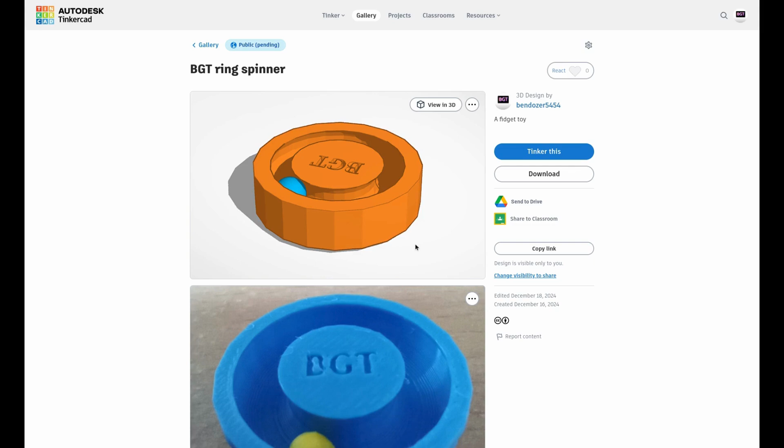After logging in, take the link given in the video's description or comments, copy it and paste it into a tab. You'll then be met with a screen. If the link is invalid after a while, you can search it up using BGT Ring Spinner.

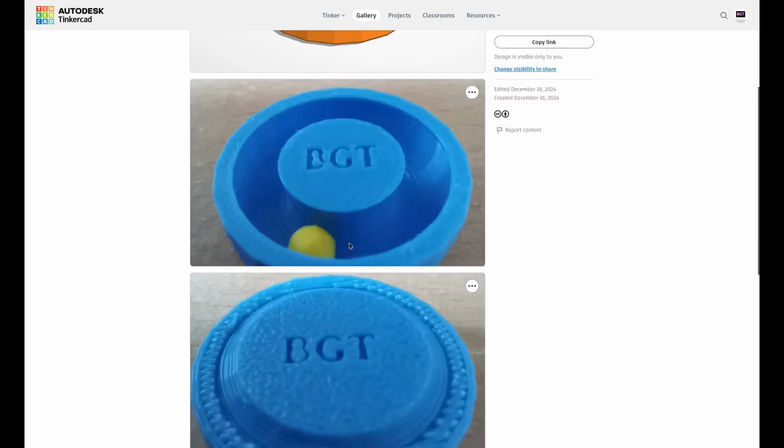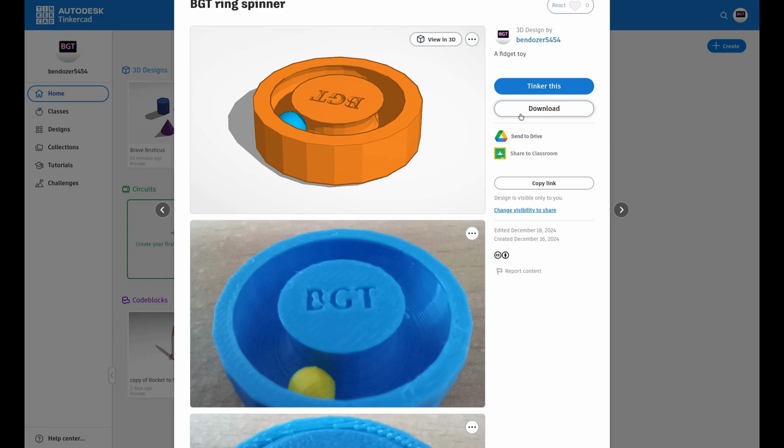You have two screens, either a touch screen or this screen. Either way, you'll have two buttons: Tinker this and Download. If you want a single color print, simply click Download and download either of these files. If that's not possible, use the file converter to convert the data to whatever slicer data you need.

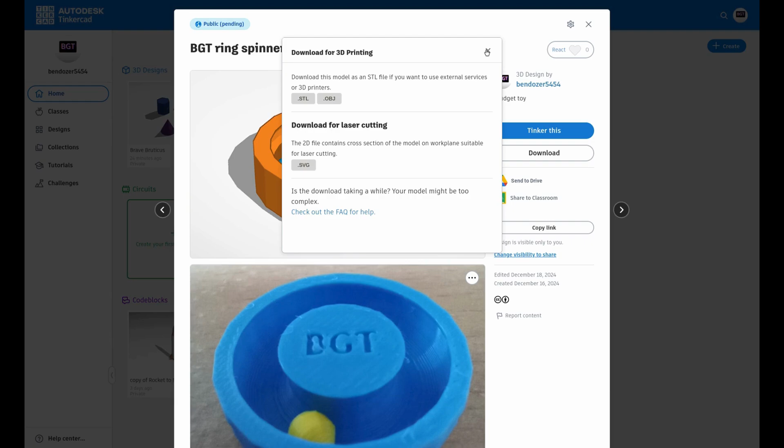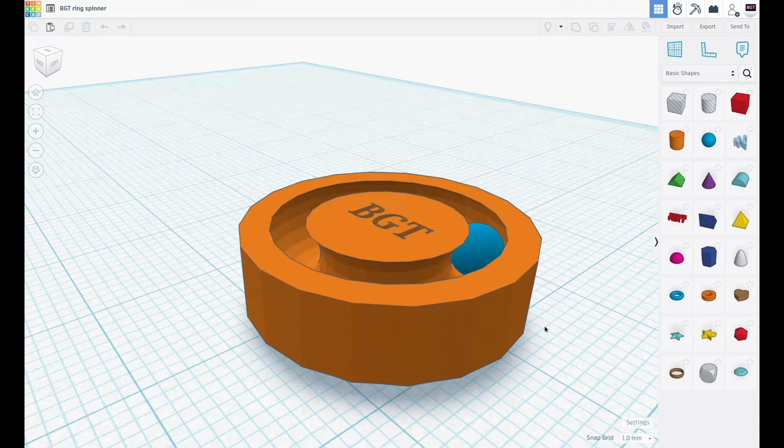If you want a multicolor print, click on Tinker this, because normally it will think it's one object. After clicking on Tinker this, you'll be met with a screen showing the product itself. Click on the base and export it using the 3D print file you need. Then export the other file, the ball. Identifying which file is which will be useful so you don't get confused about what you're downloading.

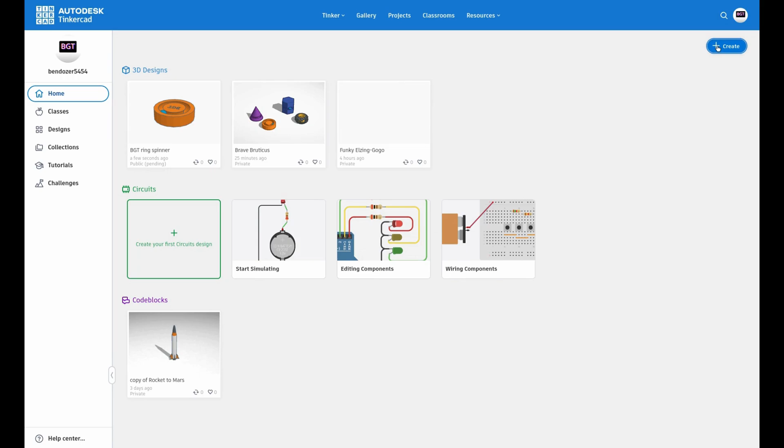The tutorial isn't over yet. Now I'm going to show you how you can make it yourself. First, create a new project, 3D design. You'll then be met with an empty canvas, or work plane.

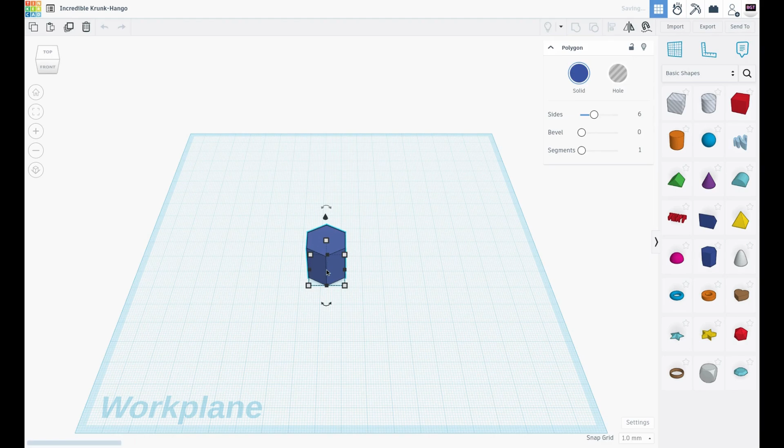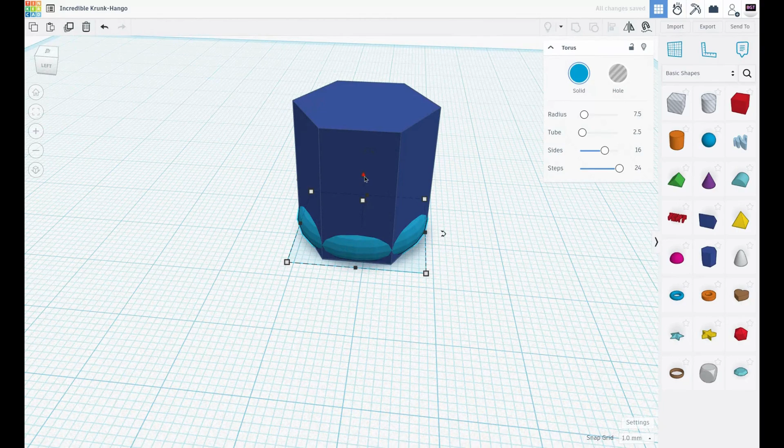Pick your favorite object. I'm going to pick the polygon, then pick the round ring. Size it to your liking using the squares given at each corner or side, then fit it further. Pick hole. The recommended steps and sides is always 24.

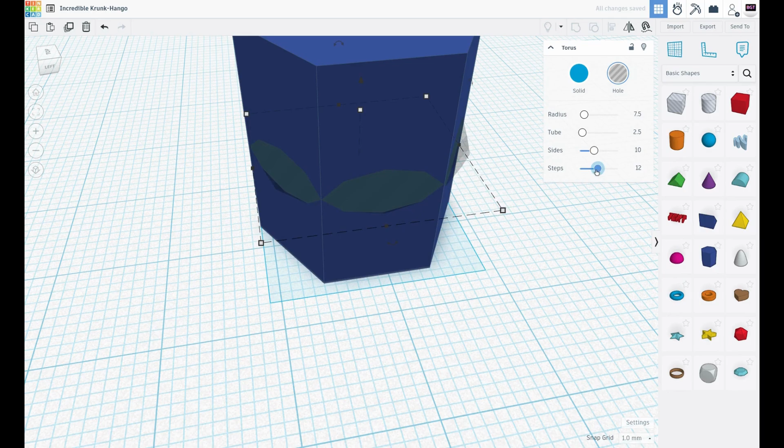If you're going for a low poly style, the recommended value is 10. I'm going to go with 24 for this tutorial. Radius and tube size can be modified for sizing it correctly. I'm going to modify it like this.

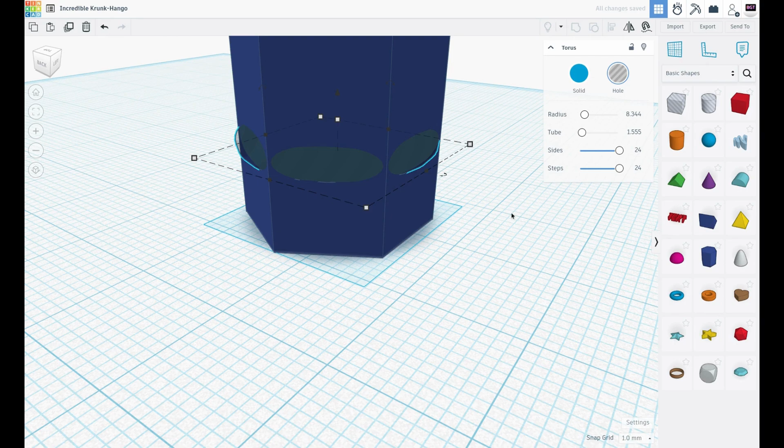Choose both objects and group them. You'll finally have a torus with a hole.

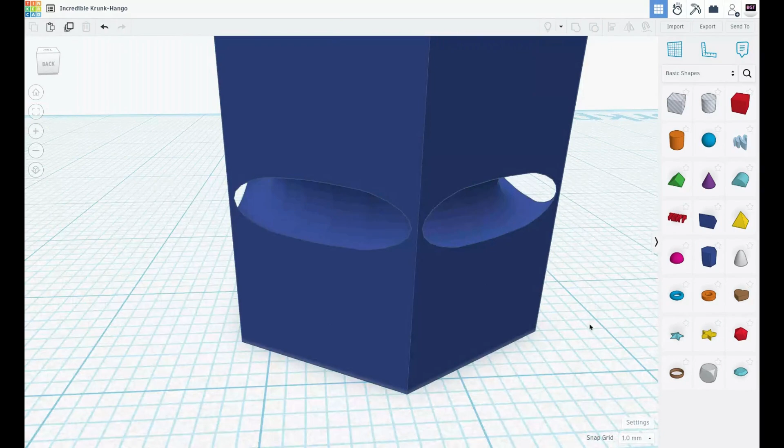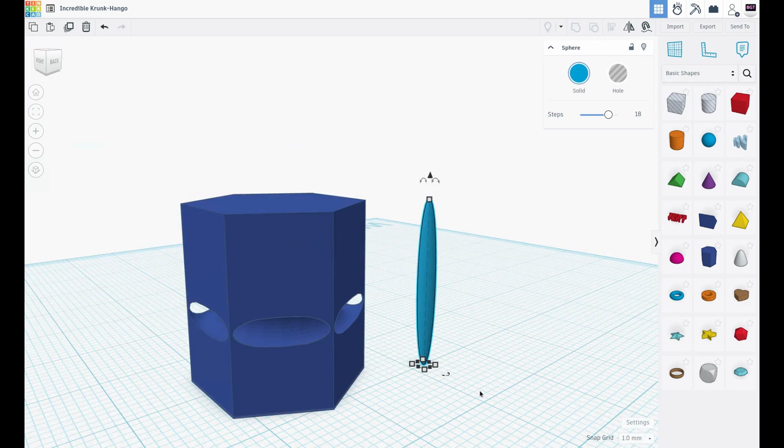Now pick a ball or any round object that can rotate inside of the torus. Size it down to the size of your torus, preferably adding a couple more centimeters or millimeters depending on the size of your torus. I'm going to make it really small for the reasoning of this tutorial. Make sure the ball is not smaller than the openings of the torus or holes.

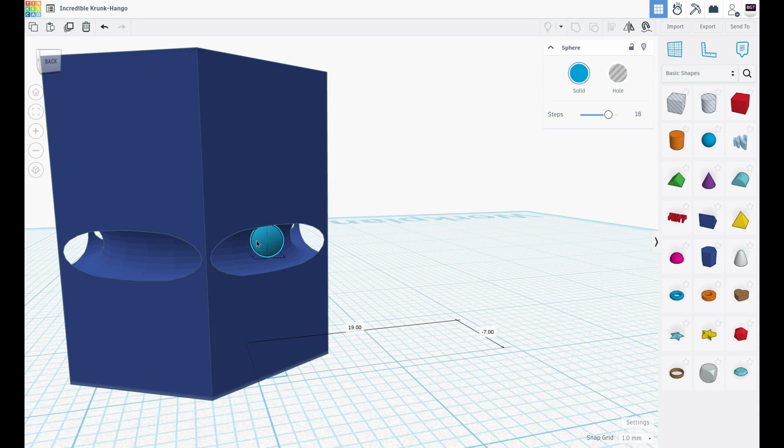After which you are done, but still make sure the objects don't touch. If they do, they'll print inside of each other, making them very hard to separate.

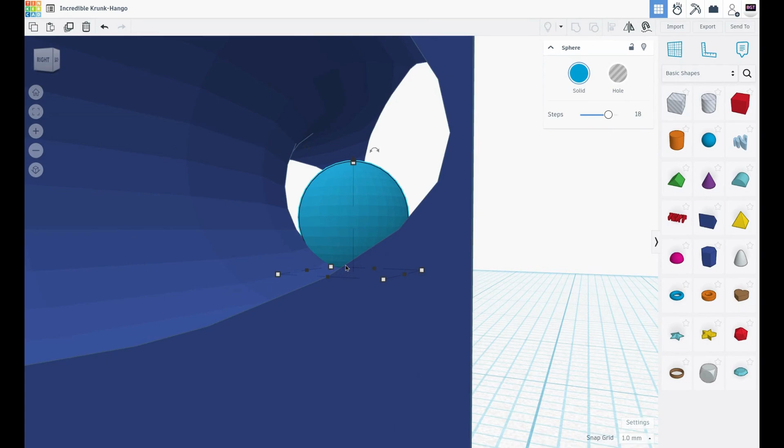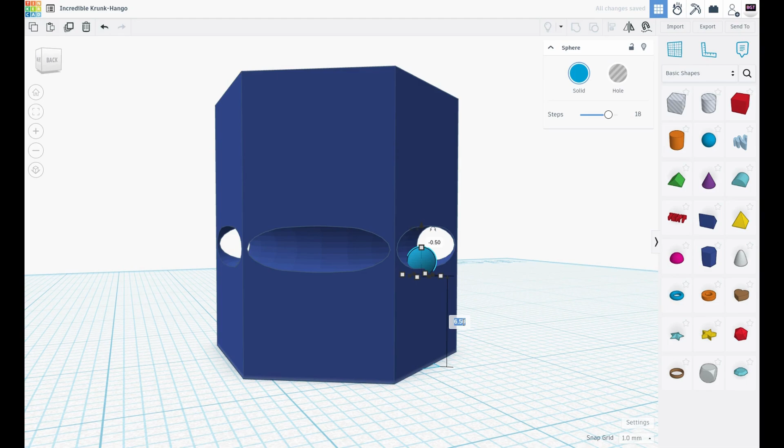If possible, correct yourself by dragging this a bit. Put it at preferably the number of height minus 1 plus 0.5. Oh wait, maybe more, 7.5. This is now not touching the object.

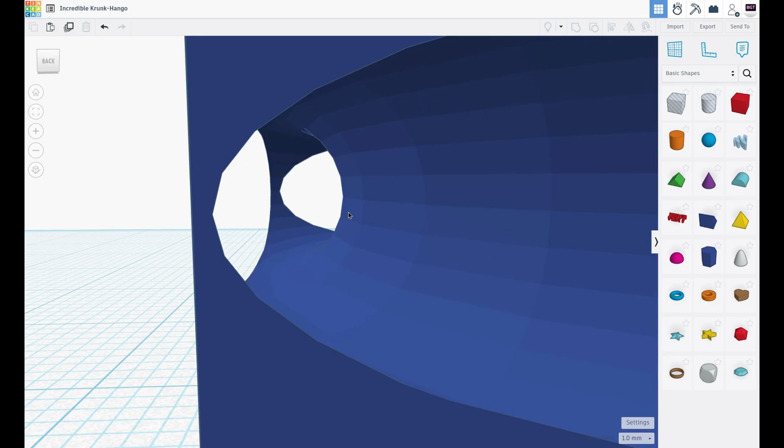Now, I've made a fatal error of making the torus too open. This means it will not function and will just fall out. To prevent that, ungroup this and make the torus smaller, preferably by 1 unit.

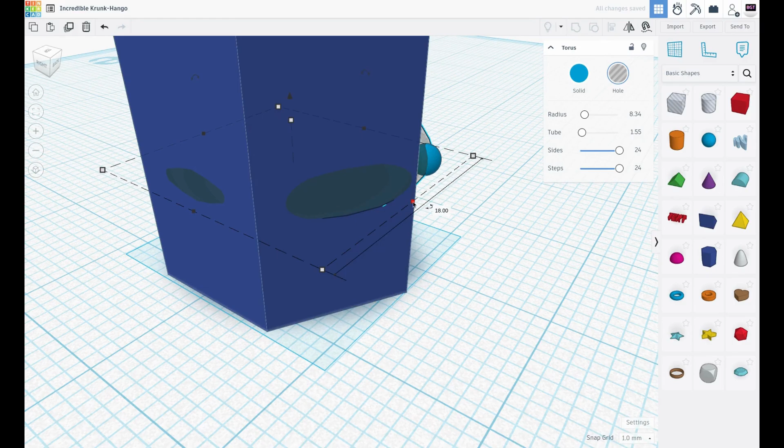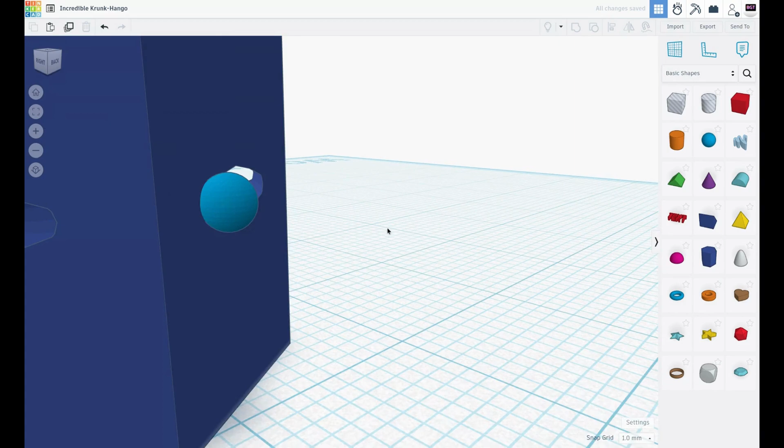Choose the objects again, mind that you should not choose the ball. After which, you can just fit the ball through here. Make sure to make the hole big enough to remove the supports after printing. If not done, the ball will not glide through the print or base.

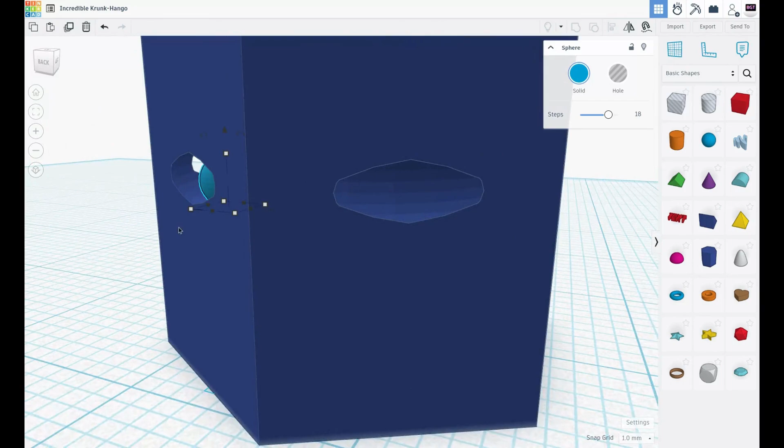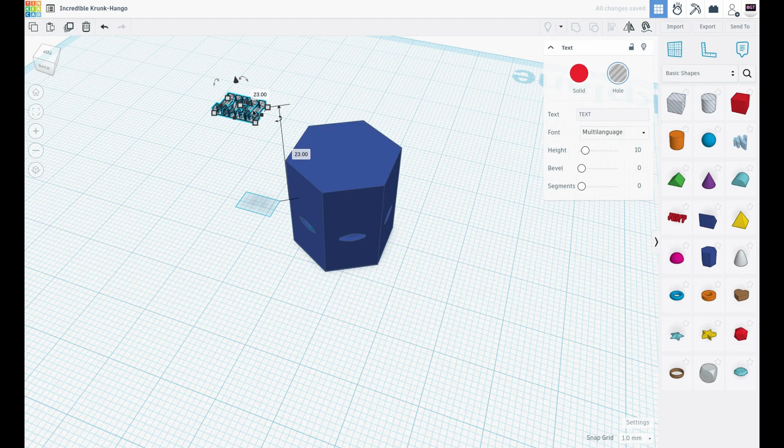You can add text by choosing the text tool, either adding mass or subtracting mass. This is a bit too big, so let's size it down and put it high up on top of the base.

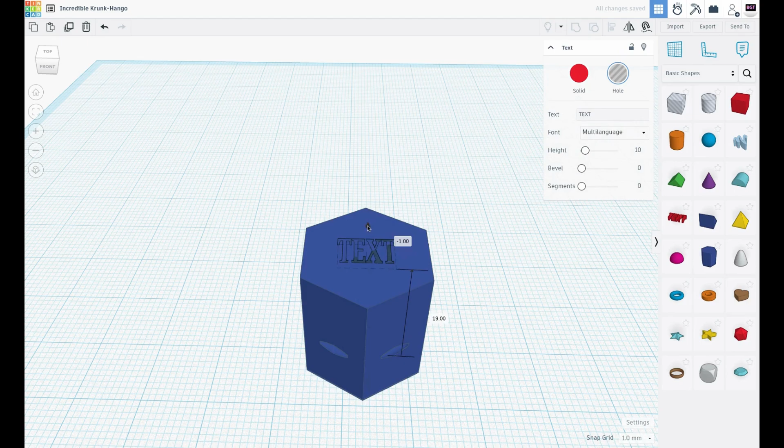Preferably put it at your favorite location. Put it down if removing mass, or on the surface if adding mass. I'm going to be removing mass for this tutorial. After which, select both items, keeping in mind not to choose the ball. Group them and you are done.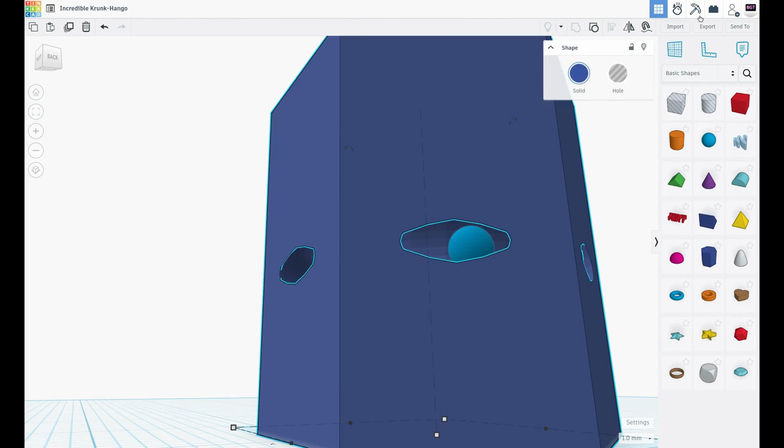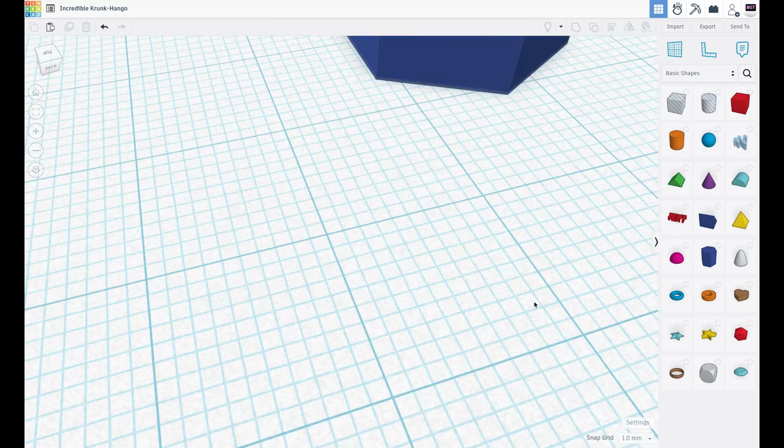After which, as repeated, export first the base and then the ball. Open them at the same time in a slicer of your printer. After which, preferably make it a little bigger because it might be a little small, and you're done.

This is how you can make a spinning ball thing.